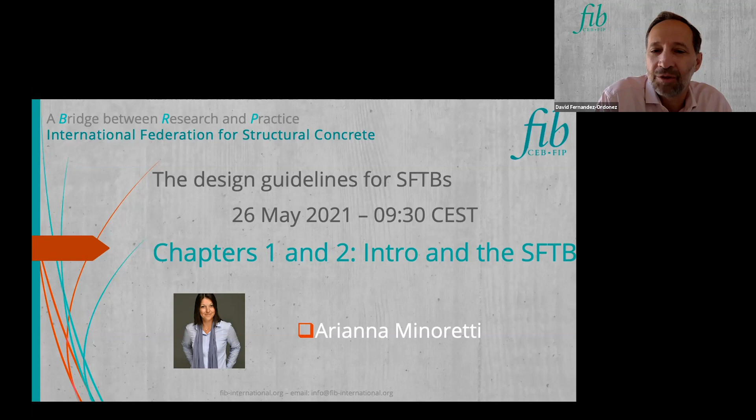Thank you, David. First of all, I have to thank Akio and Turuli for their introduction. I always learn something new every time I hear Turuli speaking, and I find fascinating the history regarding these floating structures, and to hear what new technology allows us to do today. My name is Arianna Minoretti, I'm chief engineer at the Norwegian Public Roads Administration, and as David said, I had the honor to be the convener for this working group. I take the opportunity to thank all the authors for their precious work. They've been amazing, and I'm glad many of them are participating today to present part of their work.

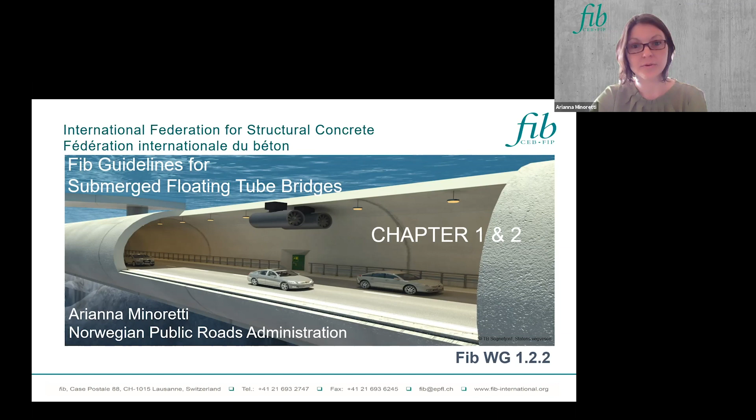So I will start from the beginning, from chapter 1 of the guideline. Chapter 1 is the shortest chapter of the guideline, but it is very important. Chapter 1 defines the scope and the limits of the entire work.

The scope of the document is to provide guidelines for the engineering community on the design and construction of a submerged floating tube bridge, based on relevant experience. For this reason, during the presentations of the chapters, the authors could refer to specific studies they have been involved in. The second important concept mentioned in chapter 1 is the topic of the guideline. First of all, the submerged floating tube bridge is a type of structure for general use, but this document focuses on concrete structure for traffic.

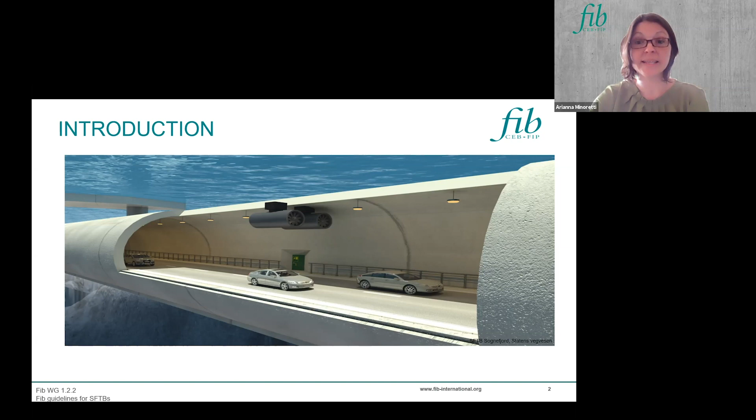Chapter 1 ends with a sentence that summarizes, I would say, the spirit of this working commission. This is one of those short sentences that takes hours to write, so I will read it directly from the guideline, because there is no way to say it in a better way, I think: The working party aims to improve the knowledge of the scientific community on submerged floating tube bridges, helping them in the design process and strengthening the confidence of the community on a type of structure that has great potential.

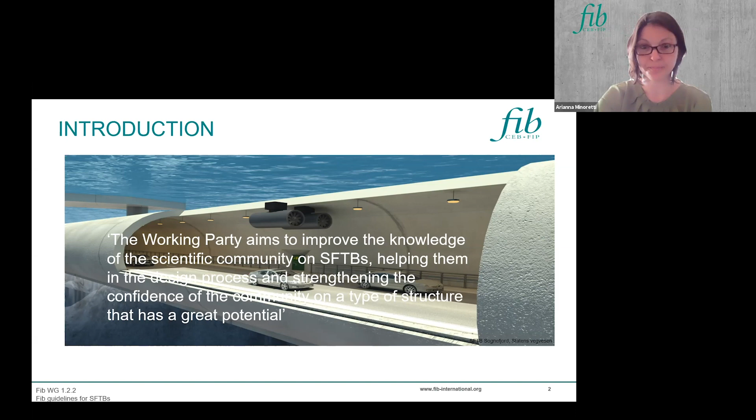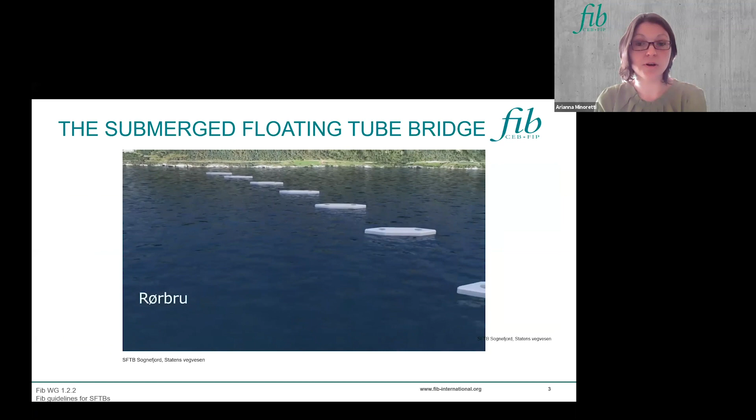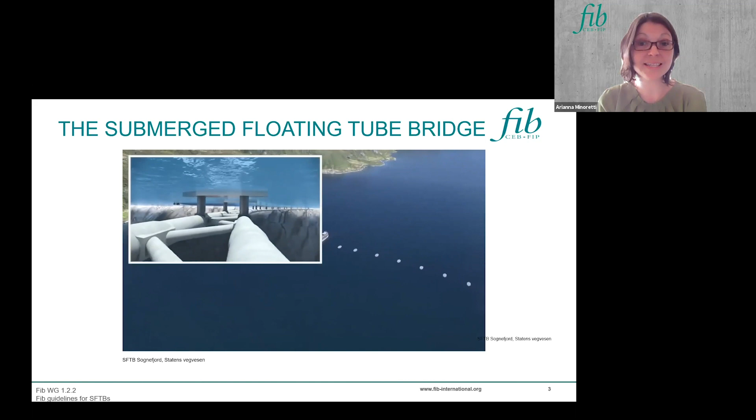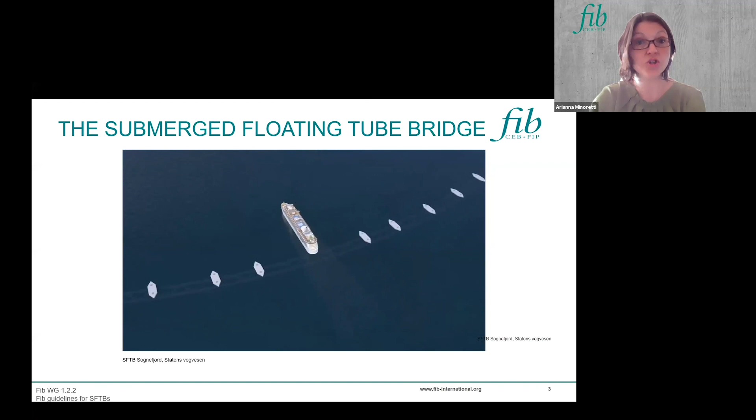So we go on with chapter 2, called the Submerged Floating Tube Bridge. Let's start from here. What is the Submerged Floating Tube Bridge? Here is an old video from one of the studies for the Norwegian fjords, done for the Sognefjord, one of the longest and especially deepest fjords in Norway. The Submerged Floating Tube Bridge, or SFTB as we call it, is a tube bridge submerged but floating at a defined depth under the water surface.

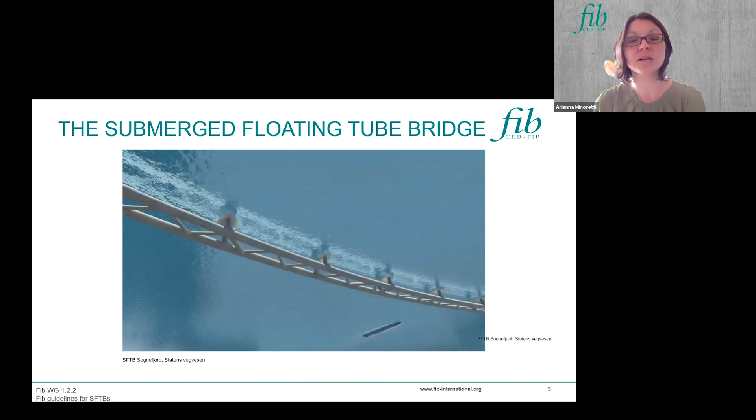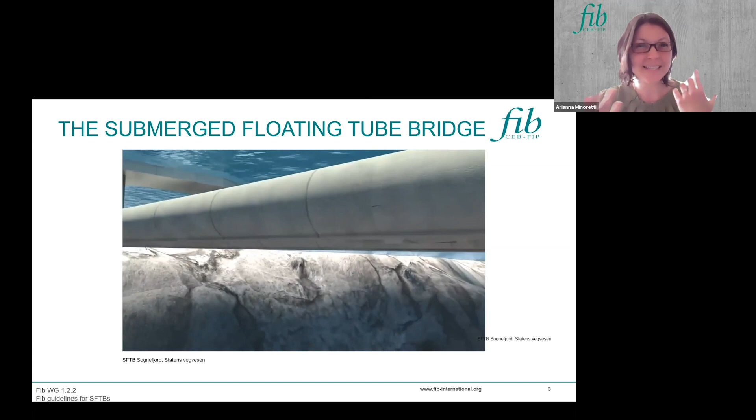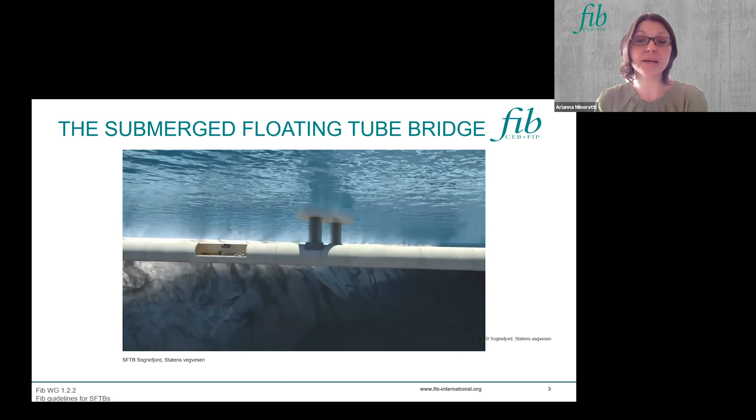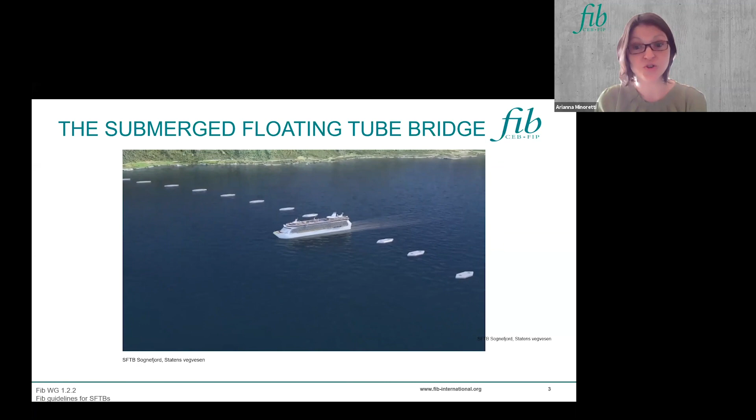The structure behaves like a bridge, being exposed not only to static but also to dynamic loads. The shape of the structure, for the users, can recall the idea of a tunnel, which is also why it is called a submerged floating tunnel. But from the point of view of the behavior of the structure, it is a bridge. As every submerged structure, it is subjected to an uplifting force called buoyancy, proportional to the mass of the displaced water. As we will see later, this gives a huge opportunity in the design to use the Archimedes principle to counterbalance the vertical loads.

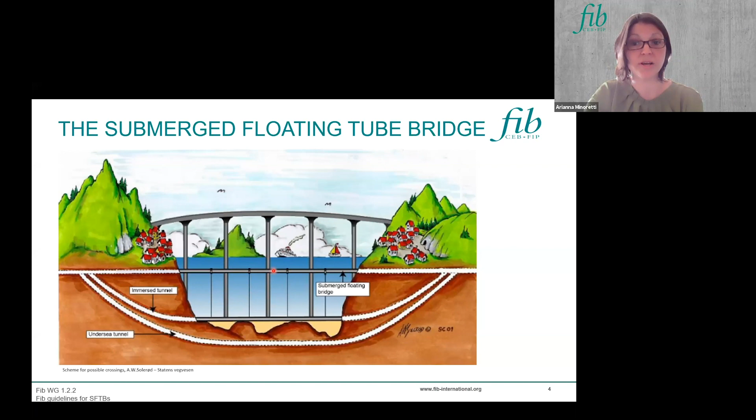In this picture, it is easier to understand the differences among the different types of crossings. From the bottom, you can see an undersea tunnel passing under the water basin. Then you have an immersed tunnel laying on the bottom of the water basin. Then you have a bridge, up here in the upper part of the drawing. And finally, here in the middle, a submerged floating tube bridge that is floating, immersed in the water.

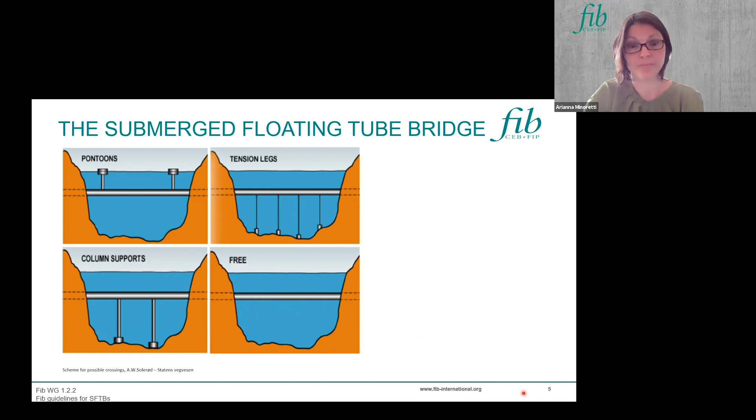It is easy to understand that all these different solutions have pros and cons. Generally, we can say that the submerged floating tube bridge is a very flexible system because it is able to adapt to different situations and challenges.

So for a situation where the geotechnical conditions of the seabed are unreliable, or where there is the possibility of landslides that could compromise the foundation system, a solution with floating pontoons could be more favorable. The pontoons are the same structure used for floating bridges, and with this component, the structure is directly exposed to the wind load, even if just partially.

Of course, having elements floating on the water surface will also expose the structure to the risk of collisions, for example with passing vessels. So these must be taken into consideration in the design, and specific analysis must be performed.

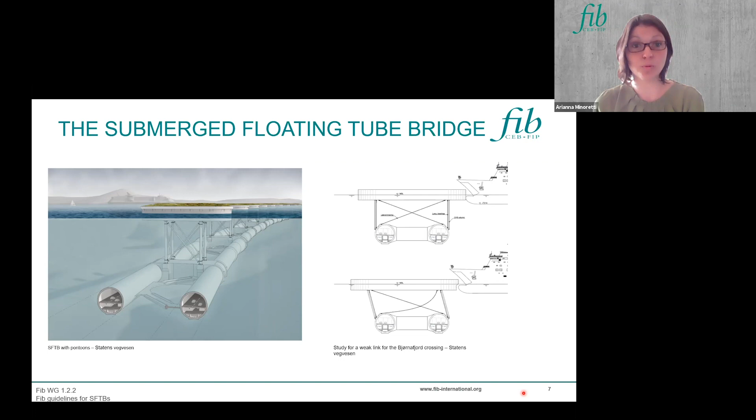But this collision risk can also be managed by developing adapting strategies for the specific structure. In the Bjornafjord study done in Norway, for example, in case of a collision with big vessels, the system connecting the pontoon with the twin tube bridge was able to interrupt the transmission of the load, avoiding overloading the structure. Of course, this means that the pontoon must be replaceable and that all the related operations must be defined and calculated in the design.

But if we have a situation where a free passage of vessels is preferable, then a solution of a submerged floating tube bridge with tethers connecting the structure with the seabed could be an alternative. This implies a sufficient knowledge of the local geotechnical conditions and requires reliable subsea investigations.

This solution will avoid collisions with floating vessels, but in case of presence of submarines, for example, specific analysis of the collision effects must be provided.

The submergence of the structure serves not only the purpose of avoiding surface collisions - and usually a draft of 20 meters is enough to exclude this possibility - but the submergence is also reducing the main sea load on the structure.

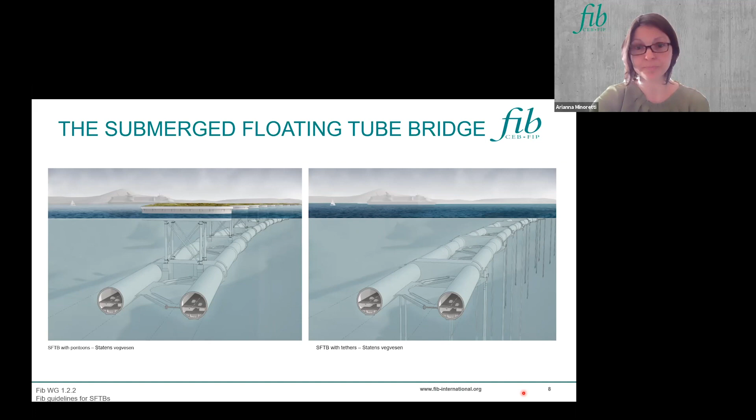So this is a huge difference from oversea bridges that are fully exposed to the loads - think about the wind load, for example - and there is no way to reduce the acting load on the structure. You can apply several strategies on the structure, but there is no way you can change the incoming load.

For this reason, the Submerged Floating Tube Bridge could be a competitive structure for crossings that are severely exposed, maybe being the only possibility to have a zero downtime crossing - a crossing that is always open.

And this makes a huge difference when you have to justify to the public the economical investment to build a new bridge, a new crossing.

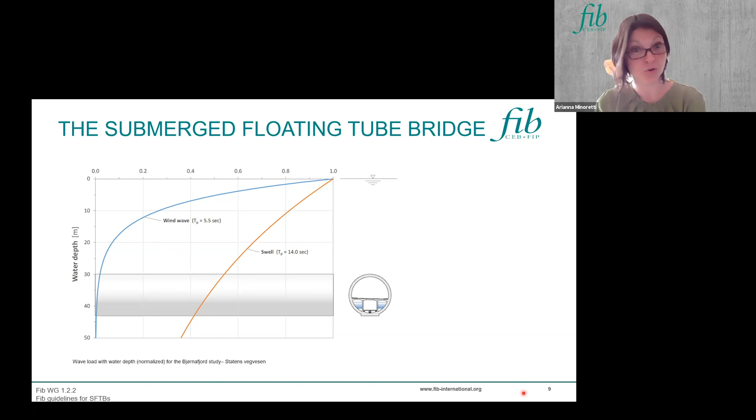This is not the only advantage of this structure. Imagine the possibility to build a hidden crossing, preserving the landscape, saving space on land, as you can do with a tunnel, but with the possibility of locating the structure just some 30 meters under the water level.

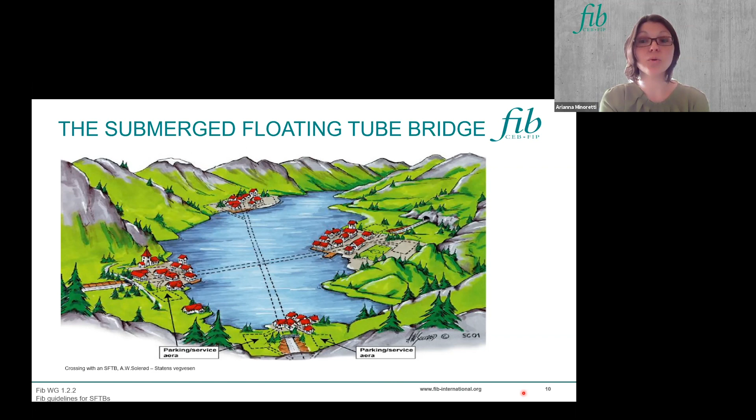So reducing the length of the crossing and avoiding the problems related to road gradient that you usually have when designing the access, for example, for a subsea tunnel. We could say that this structure combines the advantages of tunnels and bridges, giving new, unforeseen possibilities for several crossings.

Also from the environmental point of view, there are some aspects that deserve to be mentioned. As for tunnels, the acoustic impact for this type of structure is beneficial if we think about the surroundings and also the land fauna. But what about the effect on sea species?

Among the environmental issues that need to be investigated, the underwater noise pollution produced by the Submerged Floating Tube Bridge and its possible effect on marine life needs to be carefully evaluated in early design stages.

This is in order to define the best mitigation choices and procedures. This implies not only an analysis for the construction period, where we already know there is the possibility to schedule the operations, avoiding periods where the environment is more sensitive, but also an evaluation of the long-term effect of the structure, considering that the vibrations of the structure are translated into sounds for some sea species.

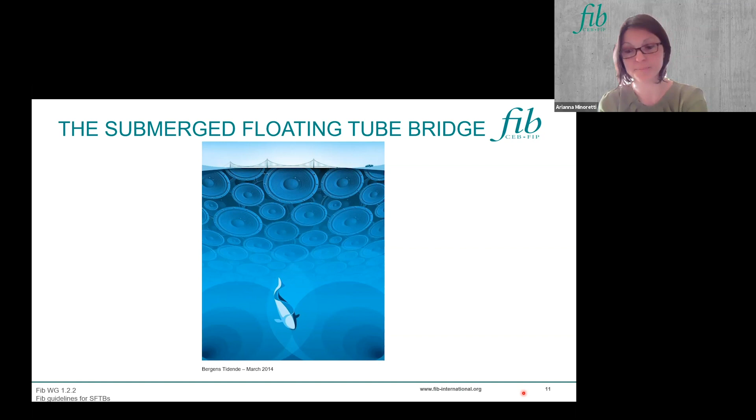And this is not just a matter of sound. The general environmental impact needs to be evaluated, both in terms of biological impact and in terms of climate gas emissions, for example. So this must be done from the early stage of the project to guide the design choices and define the best mitigation strategies. The evaluation of the environmental impact could affect several aspects of the bridge, from the geometry to the choice of materials, also to the detailed technical solutions.

On the reliability of the concept, the Submerged Floating Tube Bridge is an old concept, proposed for the first time in the late 19th century. The idea appeared in the last century for some proposals, but the necessary technology for the seabed connections and the marine operations was developed in the offshore field in the 80s.

So, for the history lovers, there is a TEDx available on the web on the story of this structure. But what is important to know is that nowadays, after nearly 40 years of applications, we can think to apply this technology also to the transport field.

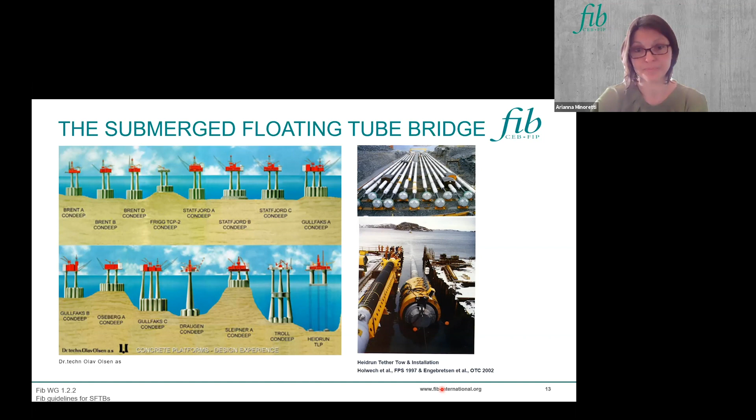In recent years, many tests, simulations, and validation procedures have been performed, and many results have been published in scientific publications. So I can say that this knowledge is available for all the scientific community.

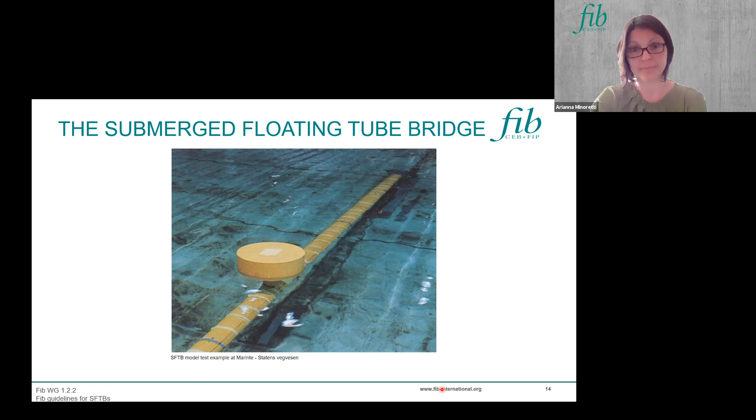It was a 600-meter bridge on these elements, sort of columns. But this structure shows that the technology and the marine operations needed to build this type of structure were already available in the 80s.

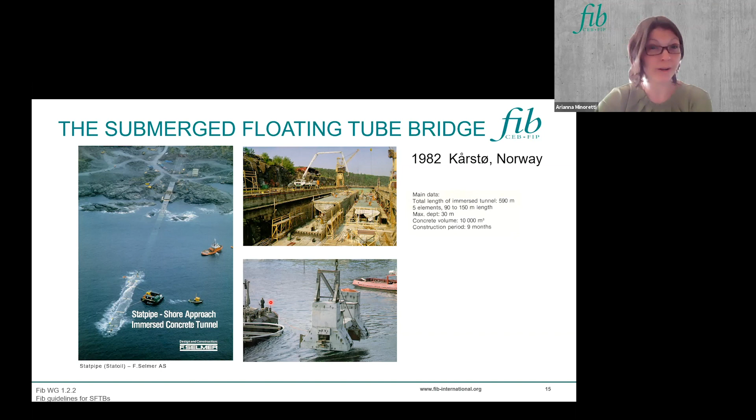And the other structure is the Söderström tunnel. This was built in 2015 in Sweden. This structure is designed for traffic, but technically it is a subsea tunnel. The fact that, as you can see in this picture, this structure is relying on groups of piles makes it behave from the static point of view as a submerged floating tube bridge. Tor Ole will mention again this structure at the end of the webinar when he presents chapter 14.

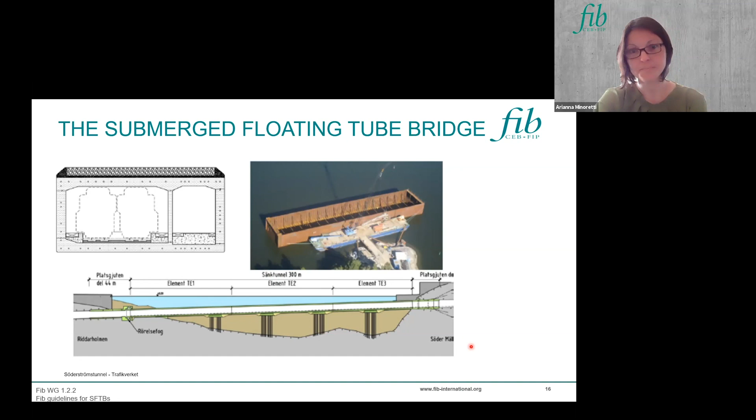Then we have a chapter on rules and regulation, a chapter on functional requirements, and then two chapters that are really connected: site conditions, and actions and action effects. Then we have chapter 7, one of the core chapters, on design principle. And then we have two important chapters that are also really connected: construction and installation.

Then we have chapter 10 on mechanical, electrical, and plumbing systems. Chapter 11 on operation and maintenance. Then chapter 12 on risk and reliability. And then the last two chapters on cost, and the final chapter that will briefly present some main studies on the submerged floating tube bridges presented in this structure.